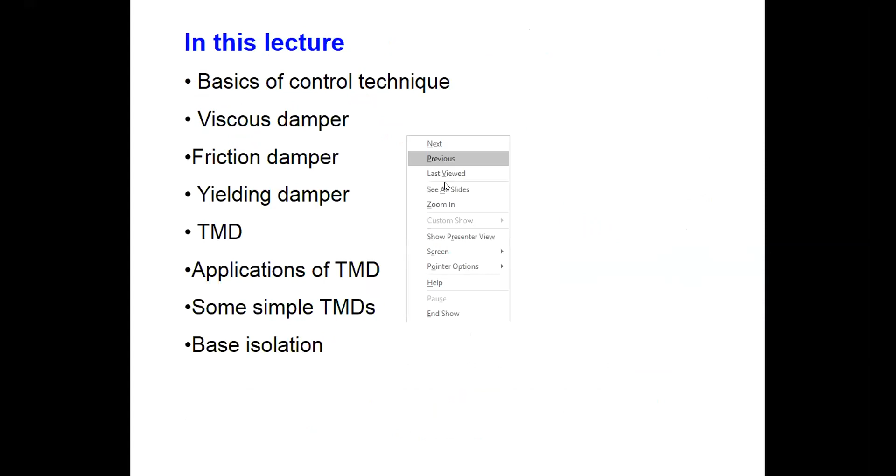So my presentation will cover some basic concepts, and then various types of dampers being used in civil engineering. We have the very commonly used viscous damper, friction damper, yielding damper, and this topic, TMD, tuned mass damper, which I will discuss in a little bit of detail. At VNIT we have done a lot of work on tuned mass dampers, particularly simple types of tuned mass dampers, and then I will also discuss a few things about base isolation.

I will play it again. So that is how shaking takes place. Sir, is my audio okay? Your audio is clear, and the audio for the video is also heard. Okay nice, okay so let us play once again, then how ground shakes, and because of that how the building vibrates. There is no damage, of course, except some peripheral things.

Okay, now let us have one more video. These videos are from E-Defense Lab, which is a very unique facility in the field of earthquake engineering. So how a structure, depending on its characteristics, responds to the earthquake. Okay, so we play it once again.

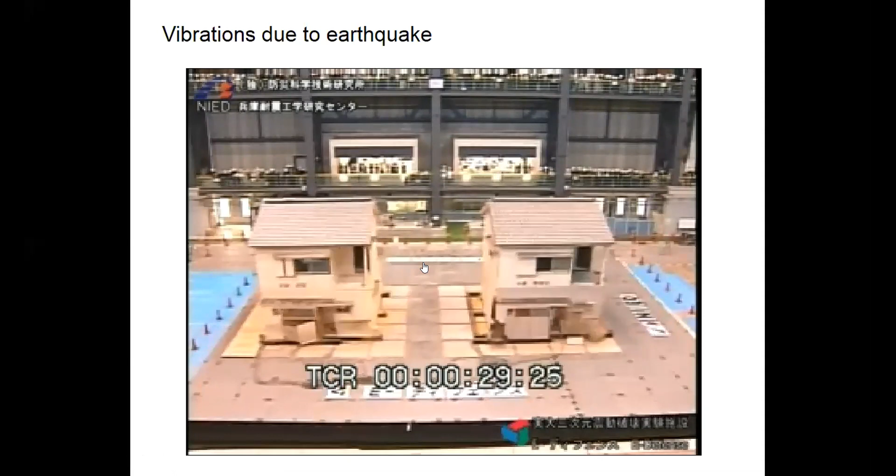So there are two buildings, both subjected to the same shaking. One has done well, another has not done well. Maybe they have put some additional features and wanted to test that. This is how ground shakes, and during ground shaking, structure vibrates. These buildings vibrate.

Now, response control is the topic for today's discussion. In that, damping is a very important parameter. All of us are quite used to dampers, shock absorbers, particularly in vehicles. So damping is of tremendous help in controlling the vibration response.

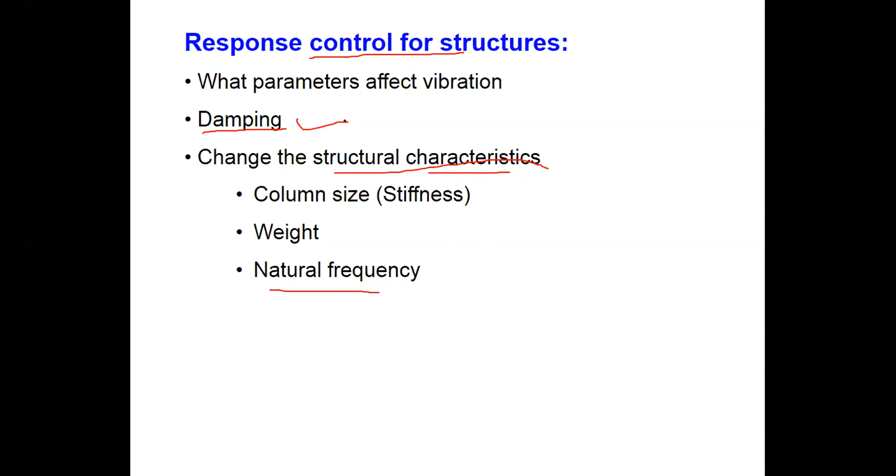The other option could be you change your structural characteristics itself, like you change the column size, weight, natural frequency, and things like that. But damping is something which provides a very good option to control the vibrations.

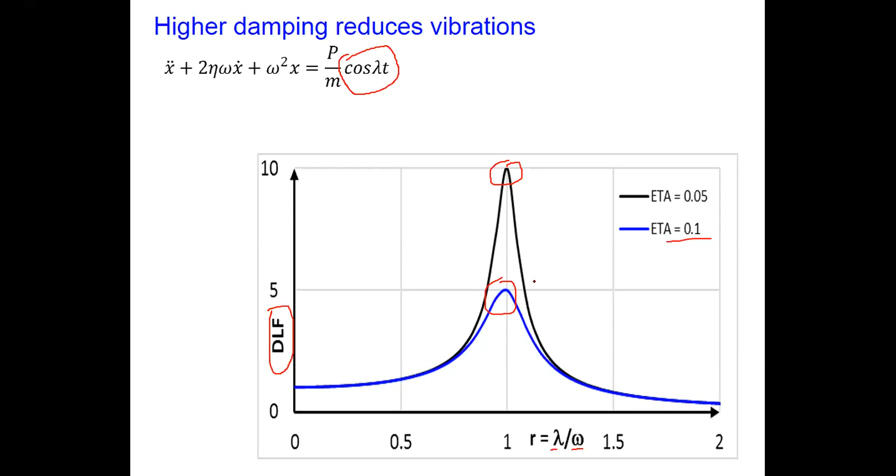As you go away from 1, the effect of damping is not much, it is negligible. On this side at 0.5, and here let us say 1.5, eta 0.05 and 0.1 graphs are same. So damping is very helpful in reducing the dynamic response, particularly in the resonance region.

Now, this is one way of playing with this thing. If suppose you know the exciting frequency - now, when will we know the exciting frequency? Suppose you are concerned with an industrial building, and a mechanical engineer says that I will mount a machine which will be vibrating at 25 hertz. So that machine will produce an exciting force at 25 hertz.

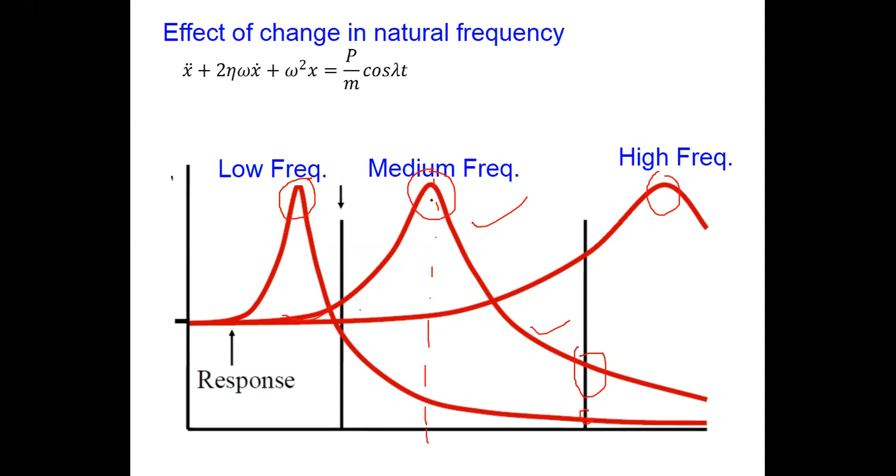So what I will do, I will shift the natural frequency of my building away from 25 hertz. I will avoid these regions. So if this is 25 hertz, then I will change my building characteristics such that I am on this side or that side of this graph. That is one way of playing with structural characteristics to avoid higher values of dynamic response. That is what is shown here.

Now in civil engineering we have passive control, we have active control, and then the remaining two are some hybrid form of that or a combination of the two. Semi-active and hybrid means some element of passiveness and some element of activeness.

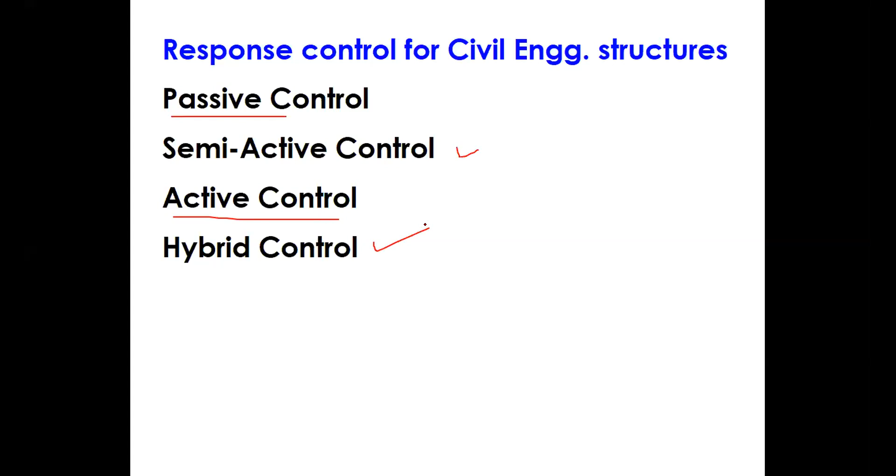See, active control means what? Something which is online. Passive control means the control mechanism will be present there whether the building is vibrating or not. Whereas active control mechanism will come into picture only when the building starts vibrating. So it requires a power supply, it requires sensors, it requires a feedback mechanism, and all those things should properly work.

Active control is very much a part of other fields like speech broadcasting - their filters are actively used to control the noise. Another example would be when you see cricket commentary: there is so much noise in the ground, but when the commentator speaks, that noise is suitably filtered. That is controlled through some active mechanism. Active filters are applied there, so that the noise doesn't enter.

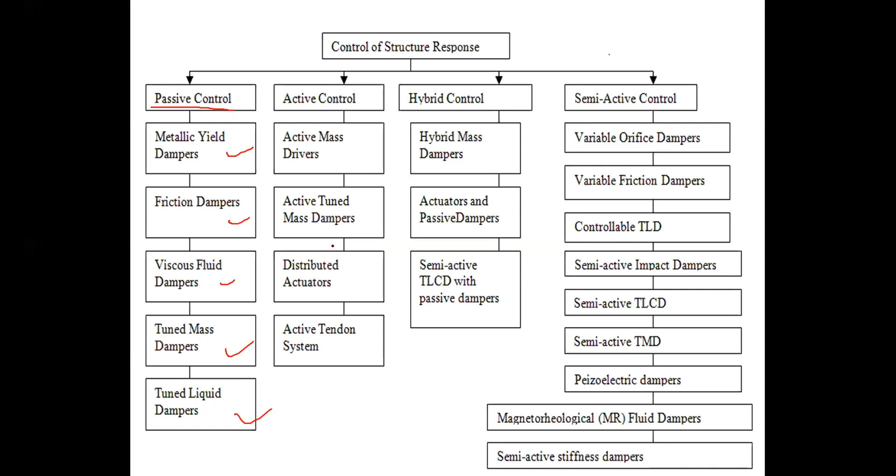Now where those active control mechanisms are used, their size is small. What do I mean by size? If suppose I have to apply active control in a scooter or in a car, the weight of the car and weight of the scooter is much smaller as compared to the size and weight of civil engineering structures. So in civil engineering structures, active mechanisms will require a lot of electric supply, a lot of other resources, because the size of the structure to be controlled is very large as compared to mechanical engineering applications.

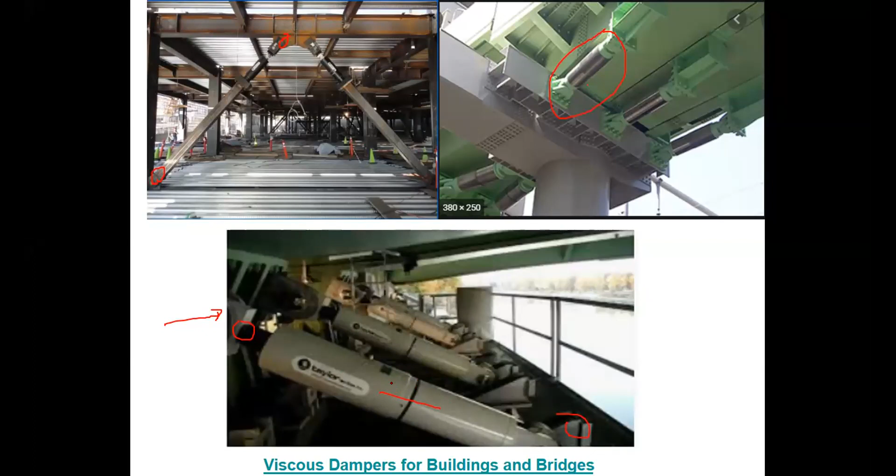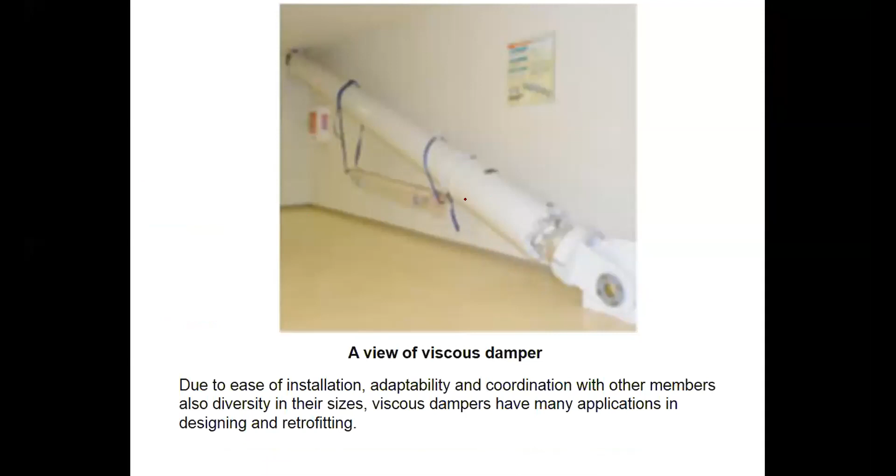So again, same thing, two ends - this is one end and this is another end. When there is a relative movement, this piston will move inside the chamber which is filled with fluid, and thereby energy will get dissipated through this movement inside the fluid. So that is how viscous dampers work. They are commercially available. Now they have to be properly deployed so that the function of the building doesn't get hampered, and at the same time aesthetics and look should not also get disturbed. So this is how viscous dampers work.

Now there is a video here. I'll play this video.

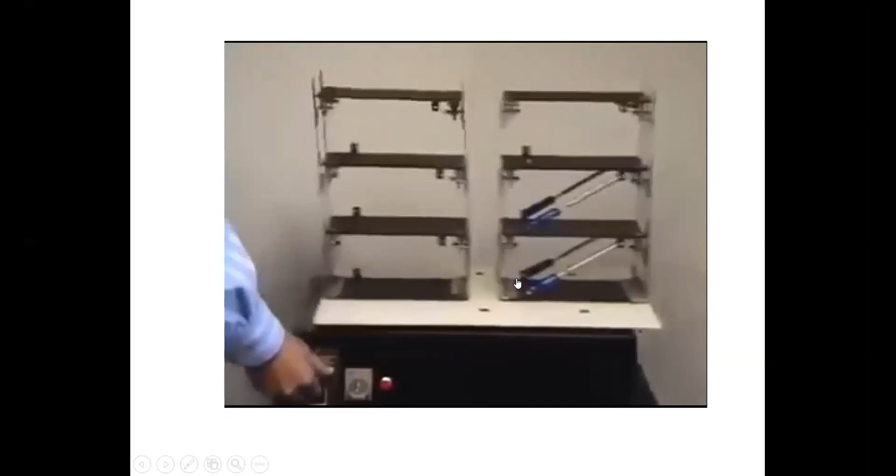See, these are two identical structures. One is fitted with viscous dampers, there are two viscous dampers here, and this one is not fitted with any viscous damper. When the ground is shaken, how do they respond? This structure which doesn't have any viscous damper vibrates.

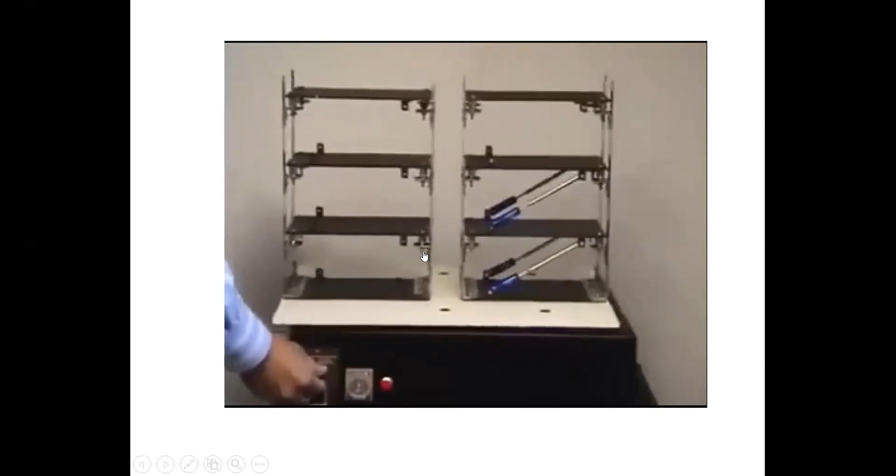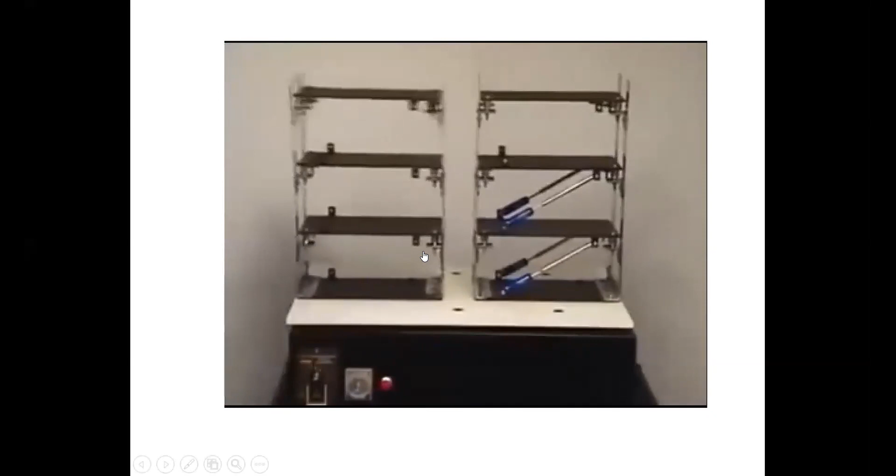I'll play again. Yeah, so that is a nice demonstration of how effective a viscous damper is.

Now, depending on the characteristics of the building, one has to suitably arrive at the size. How much fluid will be required? How much piston motion is expected to occur? That is how the length of the piston chamber will be decided. So that is a field in itself, wherein professionals are involved, apart from civil engineers, for this type of dampers.

Now, friction damper. The main purpose of dampers is to dissipate energy. In the viscous damper, it is dissipated through motion against the fluid. In friction damper, it is dissipated by introducing friction between two parts.

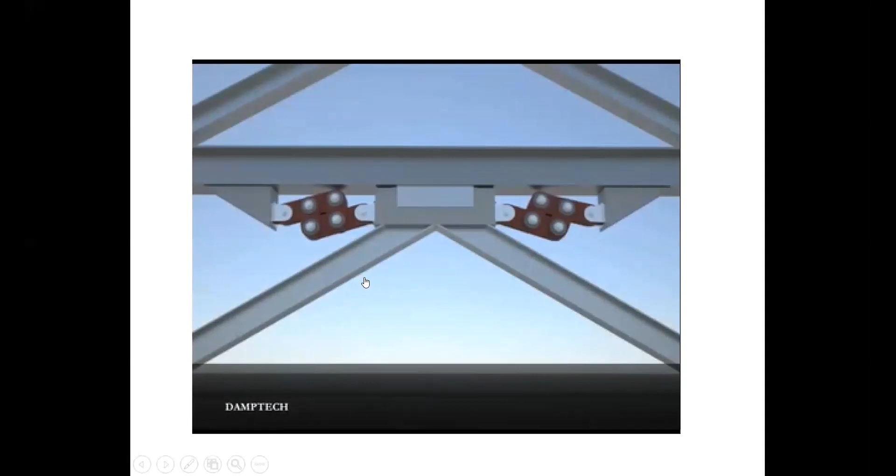Again, now there is a video. See, relative movement at two ends is transferred in the form of rubbing against these two parts. This part rubs against this part.

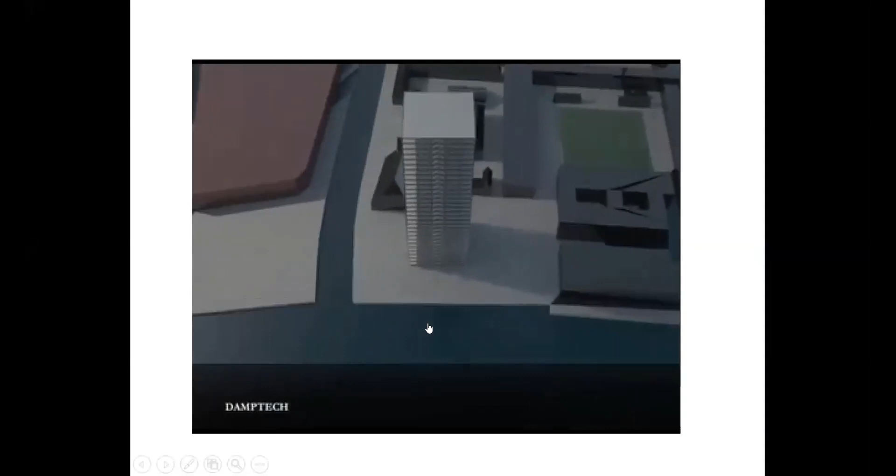And there are some frictions here also. So there is friction here, there is friction here. There are frictions here, here, and here, and they help in dissipating the energy.

So these are examples of friction dampers. Typically it is implemented in the form of a plate which is bolted to various parts, and these bolts are a hinge type of thing. They hold the two parts, but a little bit of movement is allowed. This is pictorially what is shown here.

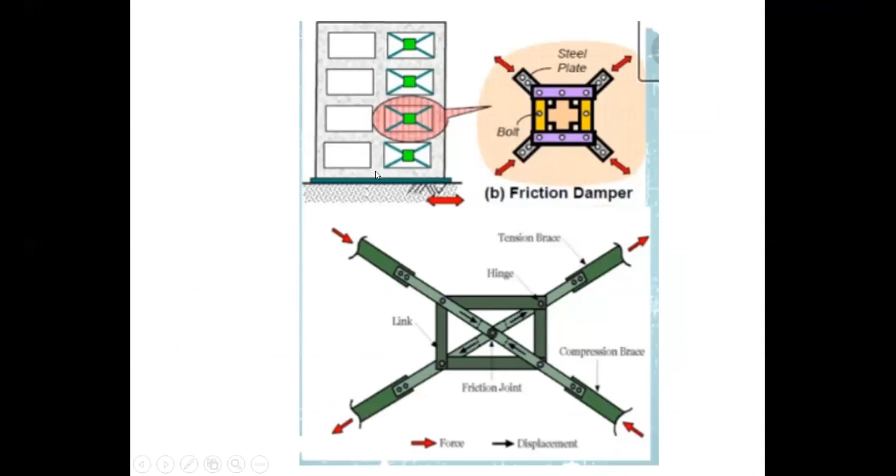And these are used in actual practice. There are places where friction dampers have been implemented and they have helped in reducing vibrations. So that is about friction dampers. Here also, mu will have to be properly decided, depending on what type of metals are being used, rubbing between two surfaces. And then, rather than area, how much vertical pressure, how much the bolt should be tightened, so that the required amount of energy dissipation is achieved.

Yielding dampers - what happens is this is the kind of arrangement we have. So when the building will vibrate, this series of plates you see here, they have a notch type of thing. Let me see if there is a figure.

Let us concentrate on this. One end is attached here, another attached here, and there is a very neck kind of thing here. So there is a neck kind of thing attached. This is the series of plates here. So when there is relative movement between the two ends,

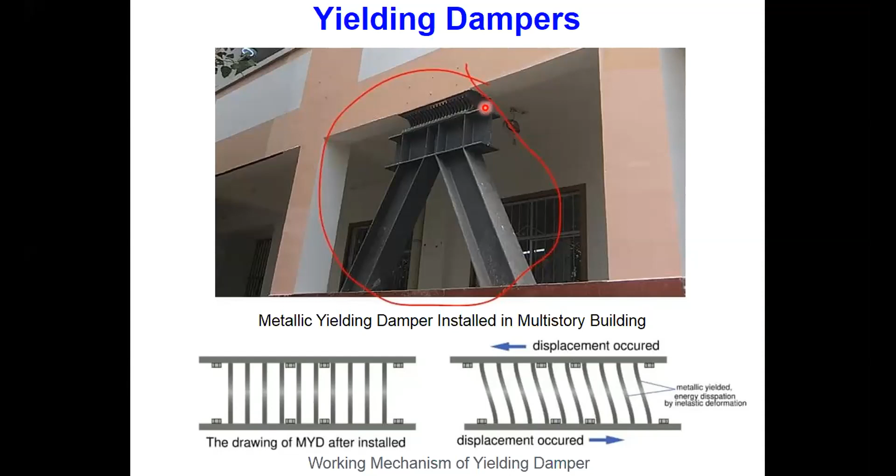this weak portion yields. It yields means - the best example of yielding is bubble gum, chewing gum. The yield goes to plastic deformation, and in the process, energy is dissipated. So there are a lot of examples of yield dampers in use.

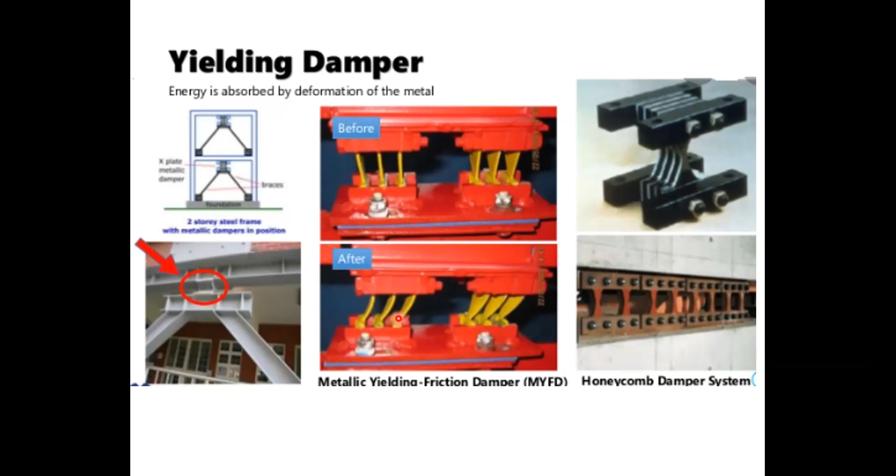This is before and after, as written here, after the testing. So they yield, they break, and then they are replaced. Because yielding itself suggests that they have to go into nonlinear range, and they will yield and things like that. So that is yielding damper.

Now again there is a video. This will be a little bit longer, but please have a look at it.

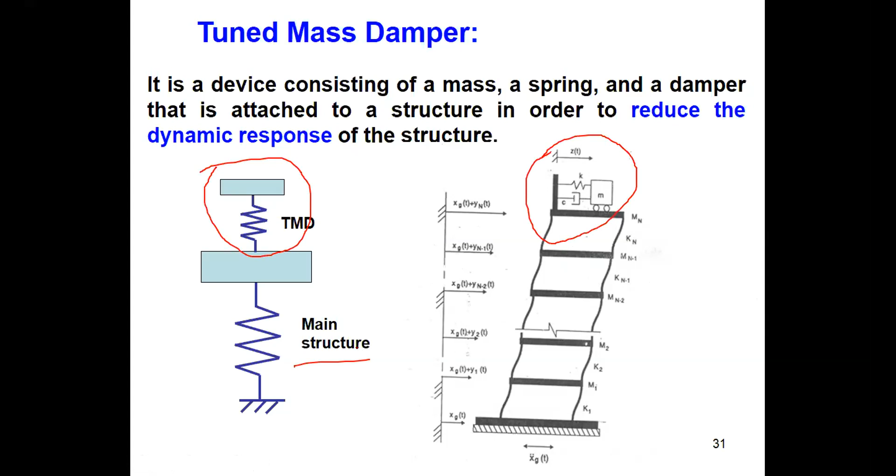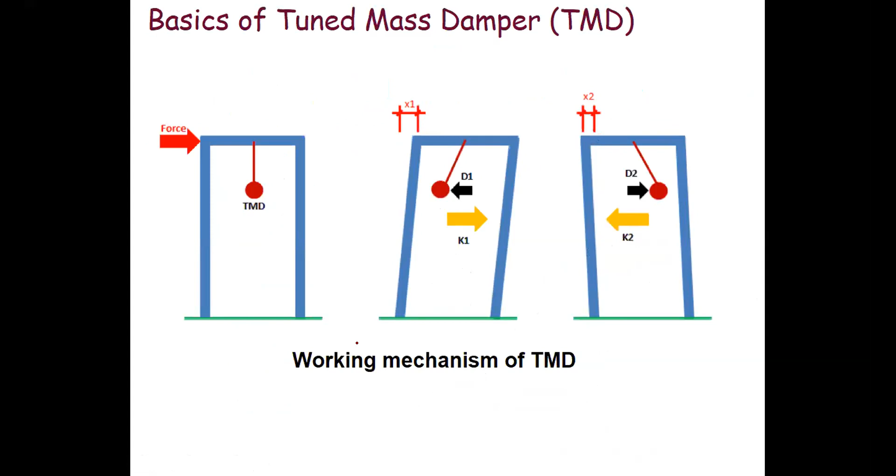This is the main structure. Now it is attached in such a way that it produces an effect which helps in balancing the structure. How does it happen? Suppose the building goes to the left, this pendulum will go to the right. So for that, you have to properly adjust its stiffness, its damping, and its mass, or in other terms, its natural frequency, so that this type of thing happens.

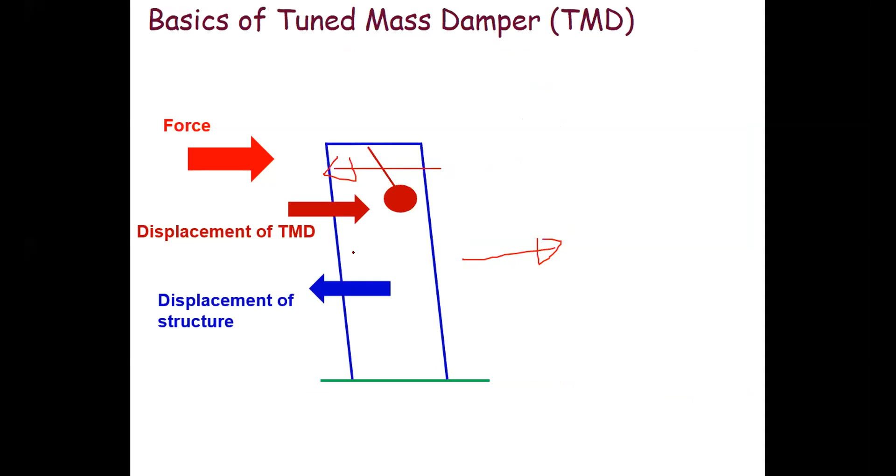And if the building goes in this direction, then it will go into the opposite of that. So this is the function of a tuned mass damper, or roughly, in a layman's language, this is how a tuned mass damper works. It produces a balancing effect, and for that purpose, its mass, stiffness, as well as damping has to be properly selected. Now let us see another video.

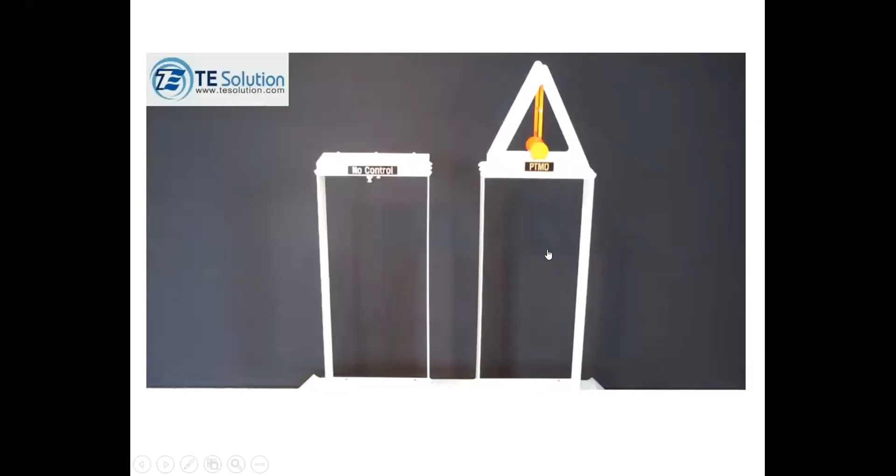Now they are unlocking the pendulum. See, once this pendulum, or TMD, comes into picture, this structure vibrates more, while this structure's vibration is very less. Let me play it once again.

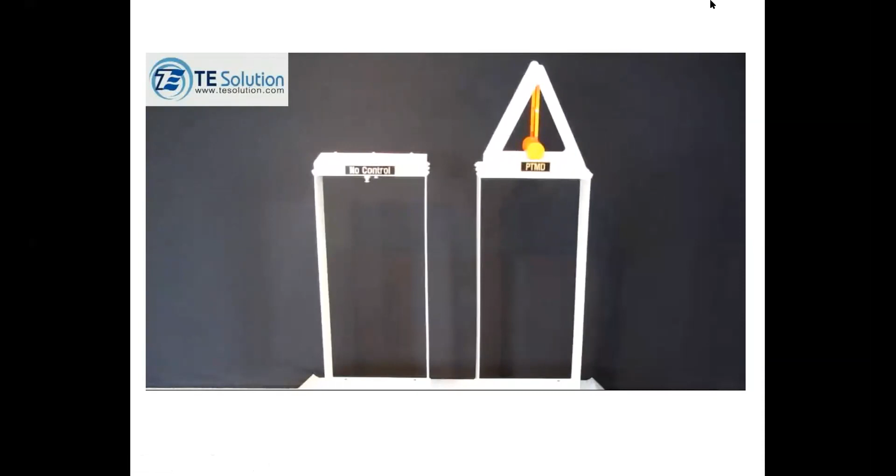Okay, so that is how this pendulum effectively reduces the vibration.

The mass ratio is how much additional mass you can put on the structure. Beta is the damping of the main system, and xi is the damping of the TMD. And F is the frequency ratio: the natural frequency of the TMD divided by the natural frequency of the main structure.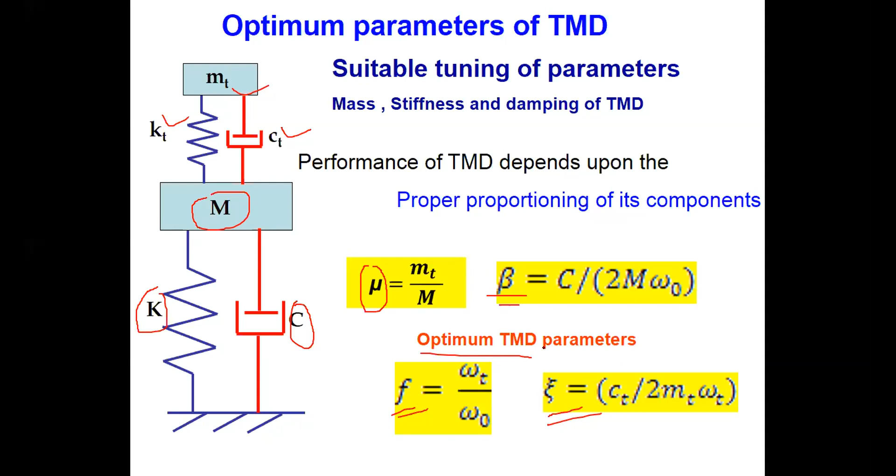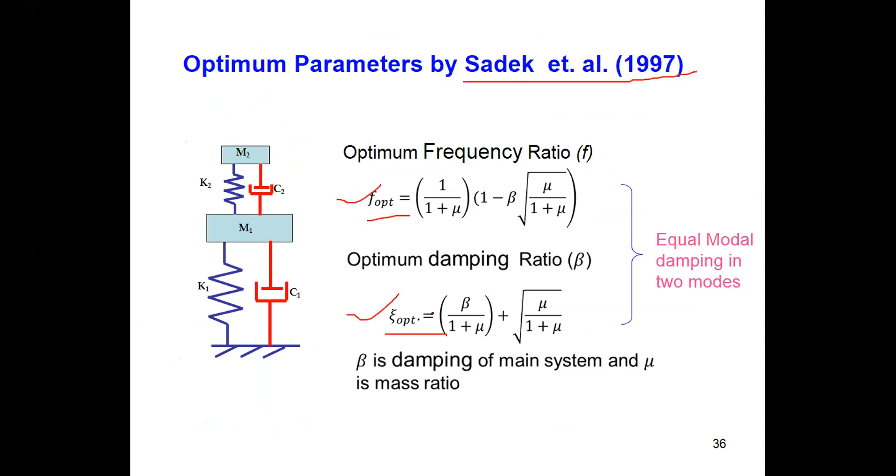With these four parameters, one can design the TMD depending on what efficiency you want. This exercise of finding the most efficient tuned mass damper is known as optimum tuned mass damper, or optimization. You decide mass ratio, frequency ratio, and xi in such a way that you get maximum reduction in the response. There are studies, for those interested in further research, right from Den Hartog in the 40s till date, people are proposing various optimum parameters for tuned mass dampers—optimum frequency ratio, optimum damping—so that one gets maximum benefit or reduction in response.

Now, across the globe, there are many interesting structures fitted with tuned mass dampers. The most celebrated example is Taipei Tower in Taiwan. It is a 101-story building, that is how it is named 101—Taipei 101. In this 101-story building...

Now, the length of the rope and mass of this pendulum ball is adjusted depending on the natural frequency of this tower, Taipei 101, and then it is very effective. There are video recordings showing that during high wind it has helped control the vibrations, and during earthquakes also it has helped control the vibration. So this is one example where the TMD is of pendulum type.

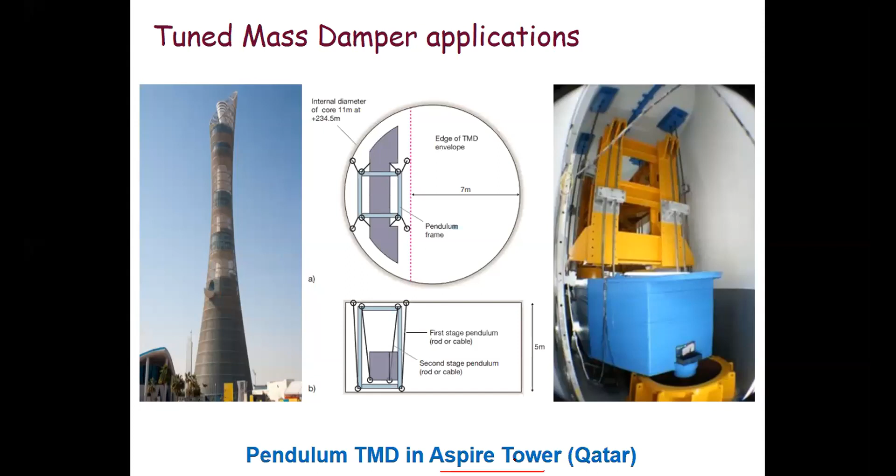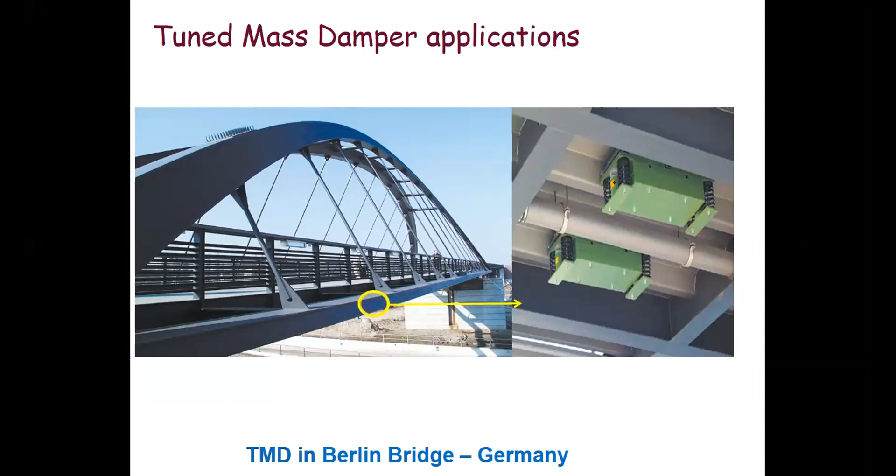This is another type of tuned mass damper with a heavy block and a spring—so this is not pendulum type, the heavy mass is kept on the spring. During vibration, this acts as a secondary system and helps in controlling it. So there are basically two types of tuned mass damper: mass resting on a spring, and pendulum type.

There are thousands of buildings all over the world fitted with tuned mass dampers. Some of the studies we did at VNIT were tuned mass dampers for multi-story buildings, elevated water tanks, and tall chimneys. In all these studies, our aim was that the tuned mass damper should be simple.

It has to be simple—I'm trying to write with the help of the mouse, that's why all these funny things are happening. Simple. What do you mean by simple?

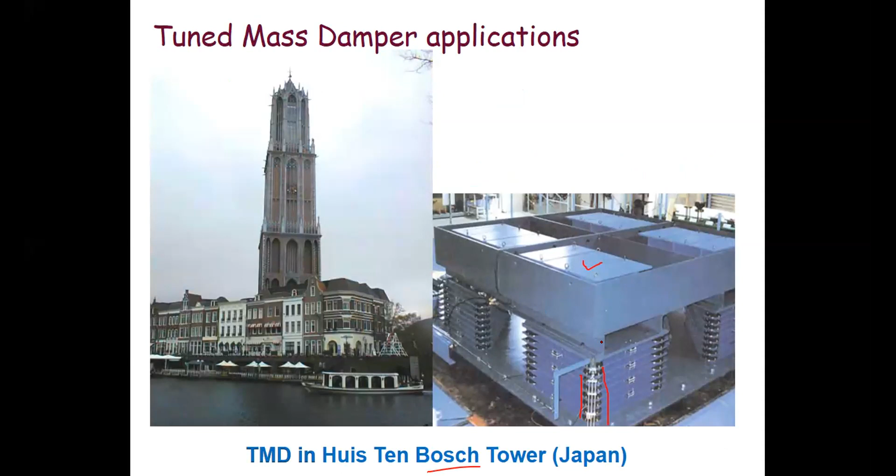This TMD, like the one in the Huis Ten Bosch Tower in Japan, requires regular maintenance. It requires additional construction, additional cost, and additional technology, so that on an RCC building you can mount such a mechanical device. It will require additional technology, additional maintenance, additional cost, and more money.

Whereas we want something simple. So how do we do these simple things? Such a simple TMD may not be as effective as those other devices. If you have a building like this,

construct one more story, with beam and column sizes different from the rest. This building won't be for occupancy. The columns of this additional story could be of steel or steel tube filled with concrete, making it a weak story. It will be adjusted so that when the building swings to the left, this story swings to the right. This kind of adjustment can be done by matching the natural frequency of this additional part to the natural frequency of the existing structure.

If that is done, it is helpful, and it is simple in the sense that whatever technology you use to construct the building, the same technology can be used here. There will be hardly any maintenance, and not much additional cost either.

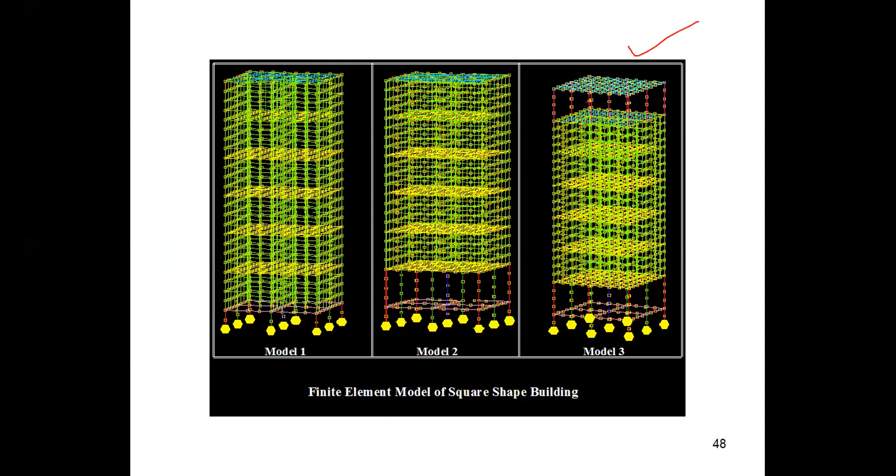We did all sorts of modeling of this tuned mass damper. This third model, M3, has a TMD at the top, and we checked its effectiveness. Model M1 is the first building, M3 is this one with TMD, and M2 is the worst case with no control.

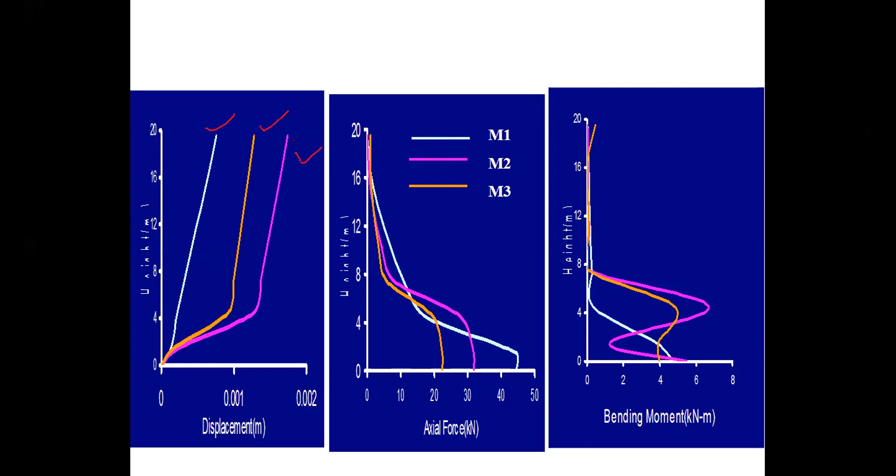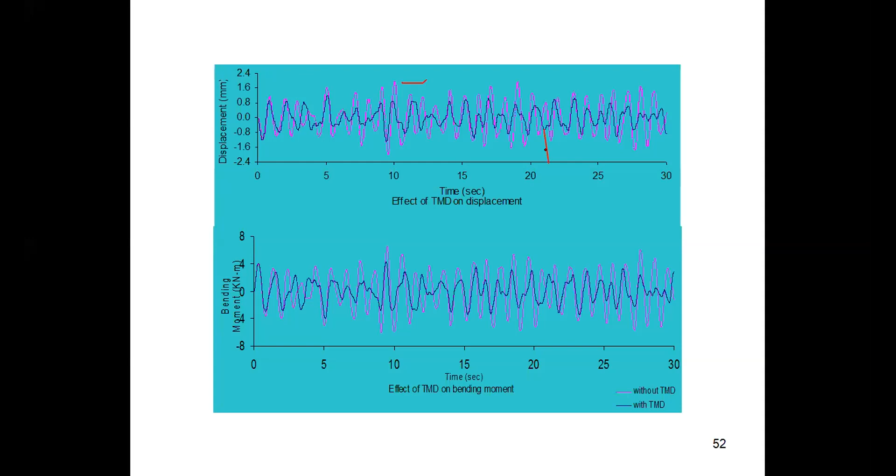That was for the building. Now, doing dynamic analysis by solving the equations of motion, the response without control is given by the red line, and with control you get this blue line, which shows that vibrations have reduced because of this simple weak story at the top.

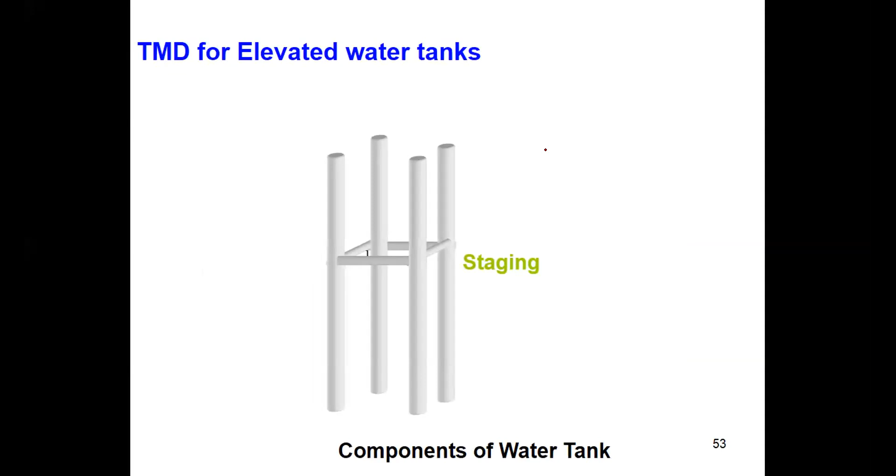Now for the water tank, let me explain what an elevated water tank looks like. It typically has the staging, then the base slab, then the container wall, and at the top a slab. Since the slab diameter is large, there are internal columns, and these columns are inside the liquid, inside the water.

In elevation, we have something like this: roof slab, container, column, inside columns. So we detach here — this portion is detached, the roof slab is detached from the wall. Then the column and the roof slab act as a tuned mass damper, with no additional cost, nothing.

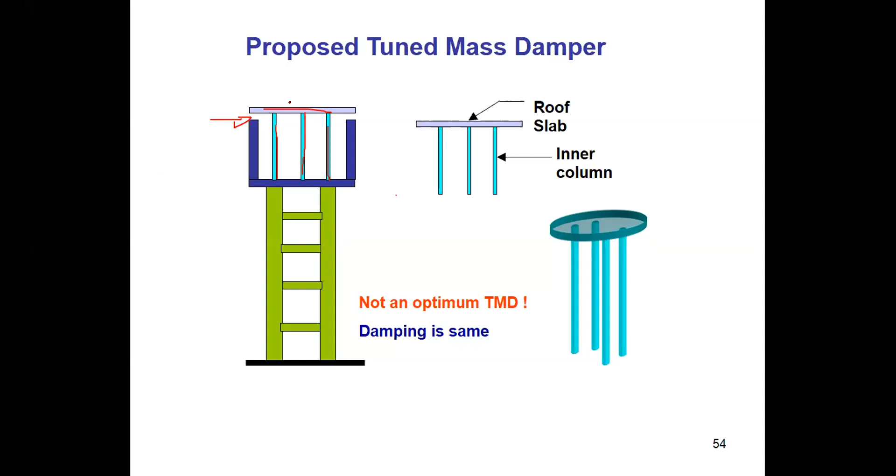I am just detaching the slab from the wall vertically, so that it can vibrate independently, and that helps. This is without TMD, this is with TMD after detachment. Doing the analysis, you can show that the peak without TMD has gotten reduced by about 15% with TMD.

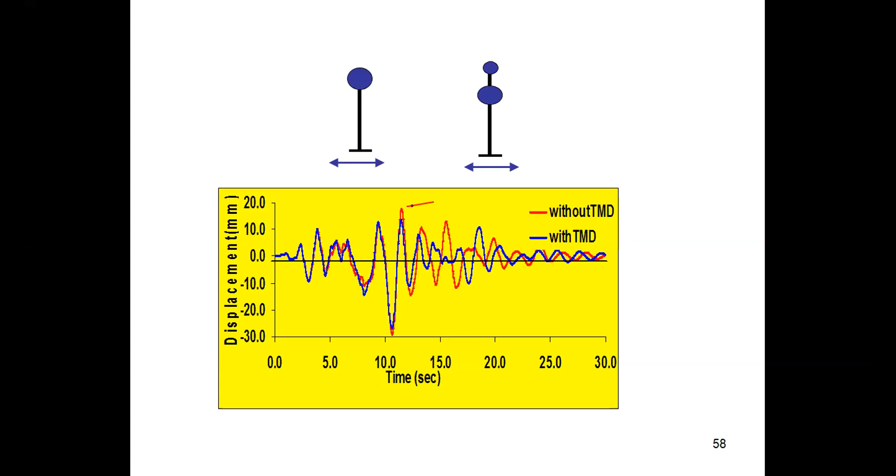So these are very simple things I am showing you. There is no additional damping, no additional issues to be added. Their performance is a little less efficient compared to a classical TMD, but they are very simple — that is the beauty of them.

Then the chimney. If you look closely at a chimney, there are flues, and outside is the RCC shell, with platforms at regular intervals supporting the flue, from which smoke comes out. So, what we have done in the chimney for the tuned mass damper—

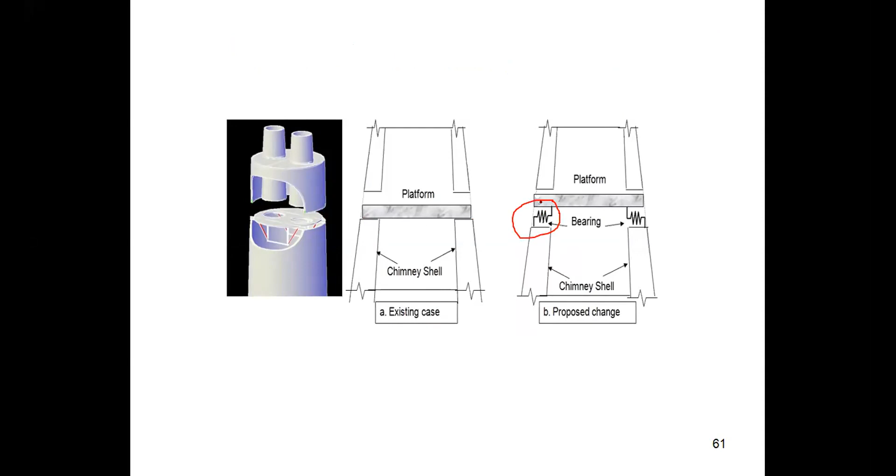this platform, which is circular with holes for the flue, normally rests directly on the chimney shell, the RCC shell. Rather than resting directly, you put a bearing here, like the bearing we have in bridges between deck and pier, so that this platform now acts like a tuned mass damper.

This is the structural detail of how the platform is supported. There are two main girders, then secondary girders, and other girders, and these triangles show the points where they rest on the RCC shell. We replace these triangles with a stiffness mechanism, such as an elastomeric bearing, so that the bearings and the platform together act as a tuned mass damper, having mass and stiffness.

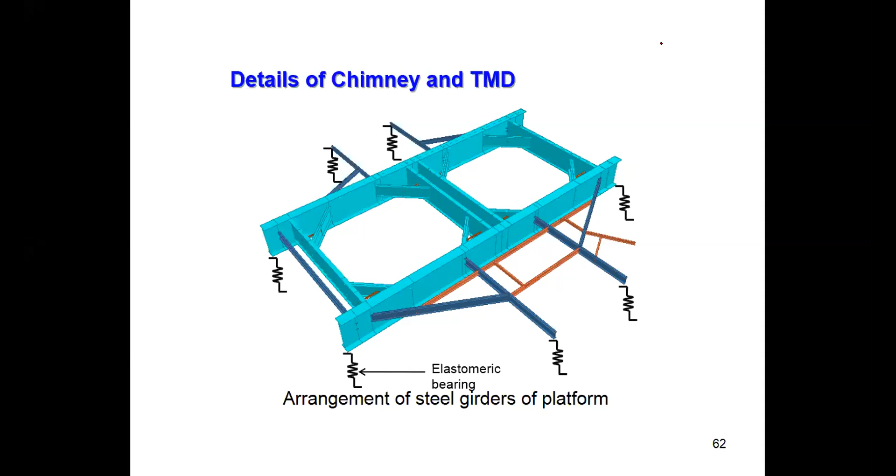Now the rest of it is result, once you see. Now here also, what is the beauty? The beauty is that TMD has been derived from the existing component. There is no additional cost, just a little bit of modification.

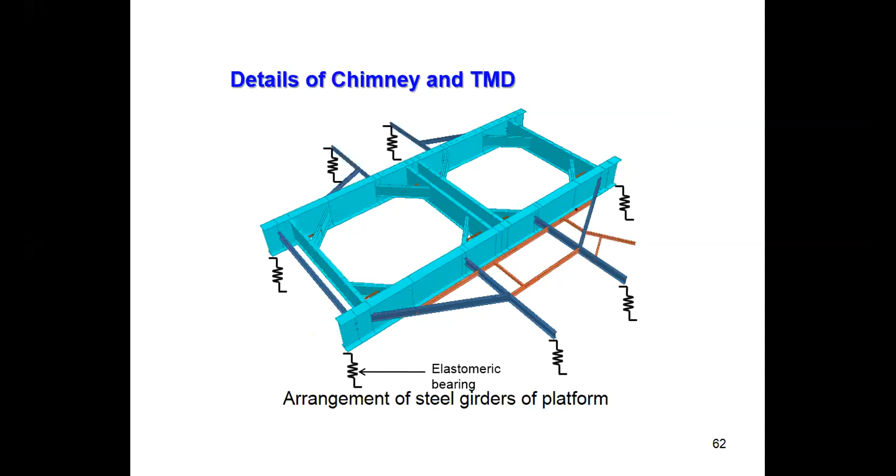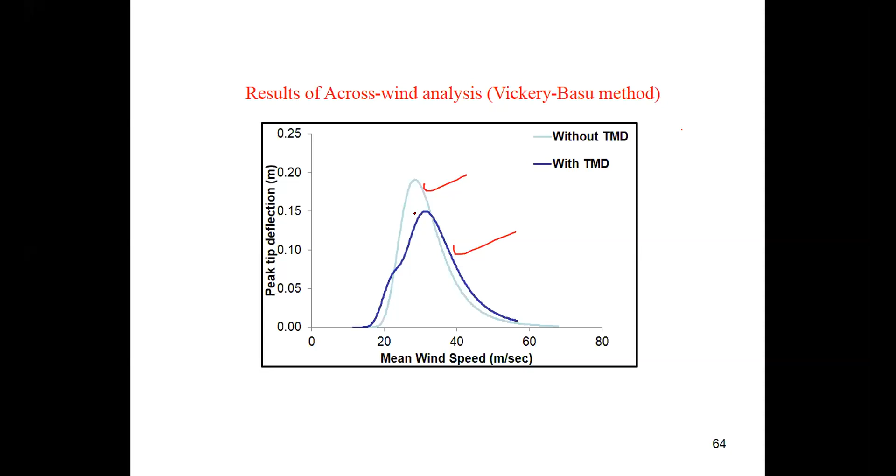Now across wind response is like vortex shedding, it's like resonance. So without TMD is this faint color graph, with TMD is this dark blue color graph. So at critical velocity or at resonant velocity, there is a huge reduction, 30 to 40%, because of tuned mass damper.

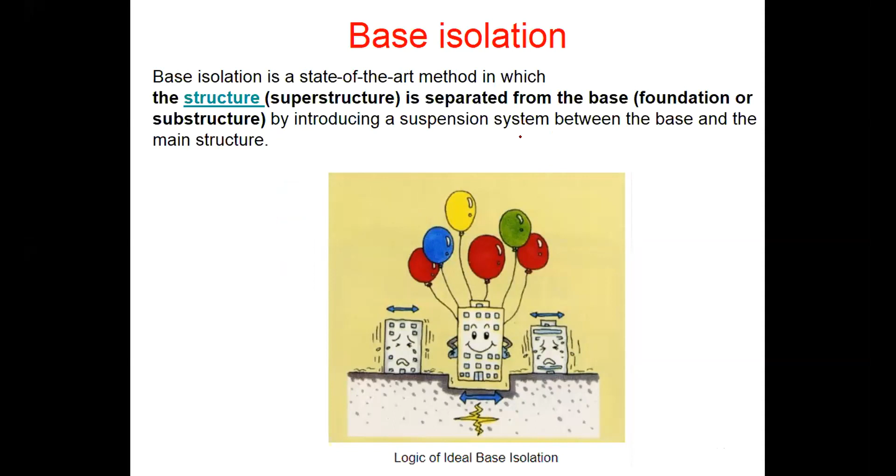Now, the last thing is base isolation. This is a very efficient and very effective technique, and of late it is being increasingly used. Rather than these dampers, now people are going more and more for base isolation. What is done in base isolation? To demonstrate that, there is a video here. Let me go to the option. I'll play this video and then explain base isolation, and then we'll stop.

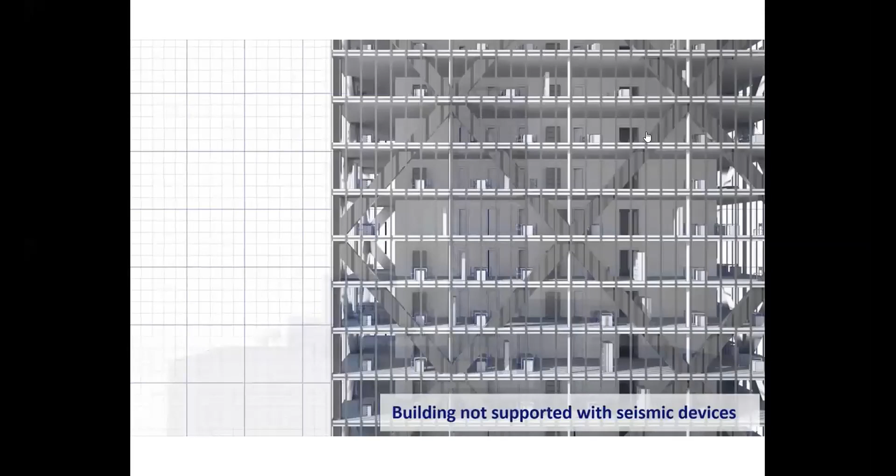Now see, they will put isolation now. Whatever simulation or animation you have seen was without isolation. Now they have deployed isolation devices at the base.

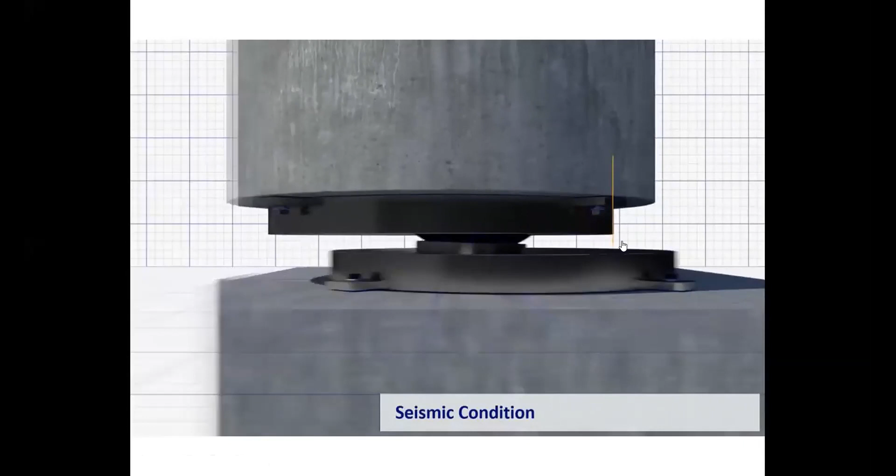Now details of this isolation, what does it comprise of? There is a ball kind of thing here, which can slide on this base.

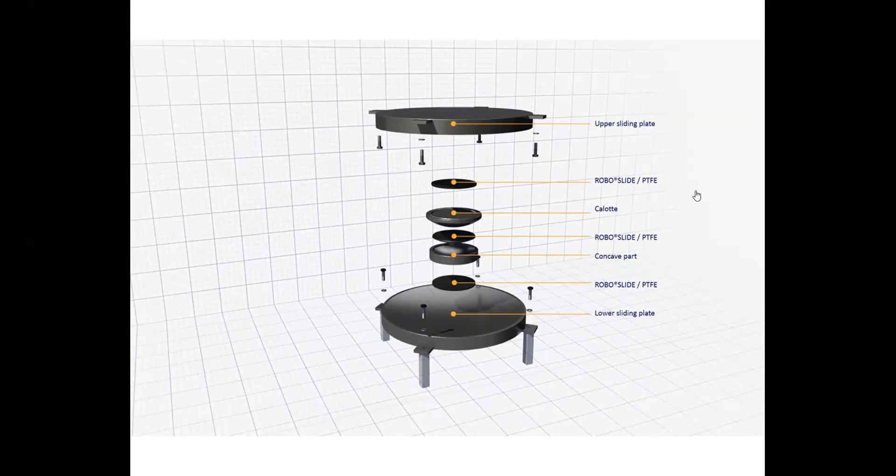These are the various components of a typical base isolation. There is a lower plate, and then there is an upper sliding plate, and then all these arrangements. So it's like the building is put on a roller, so that when the ground shakes, the building rolls. But since it should not go unlimited, this roller is in the form of an elliptical shape and other things.

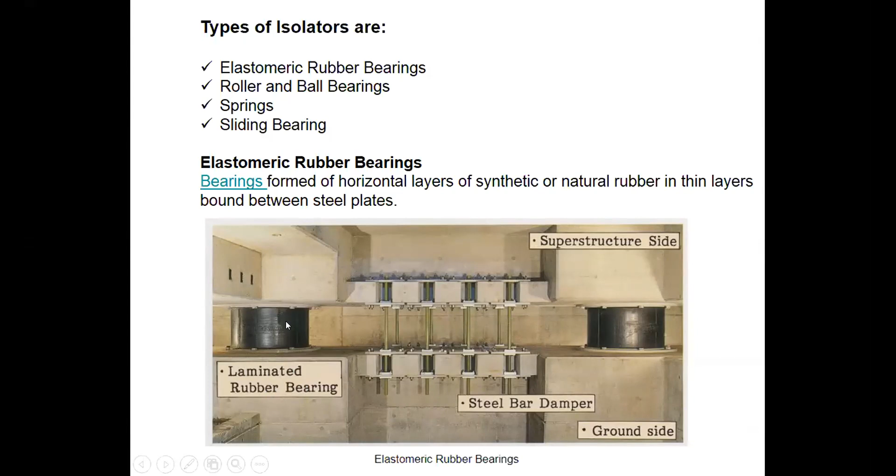So that is the description of base isolation. Now this is one place where base isolation comprises of laminated rubber bearings, that is one type of bearing, like this kind of arrangement. This whole building column continues from here and there is this arrangement. Should there be a ground shaking, only this portion will shake. The whole building won't shake as we have seen in the animation. It comprises of, as I said, a sort of roller kind of thing which is kept and which rolls during this.

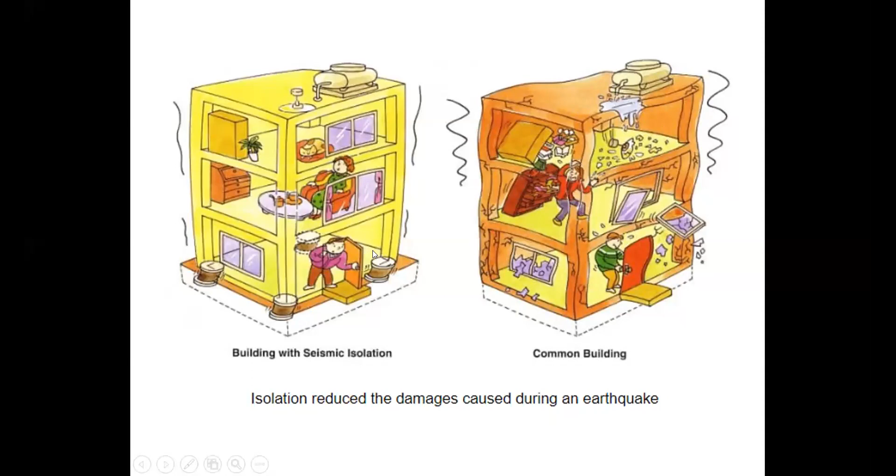This is the one being used in India, the military hospital in Bhuj, the district hospital in Bhuj, wherein base isolations have been used, and now applications are increasing.

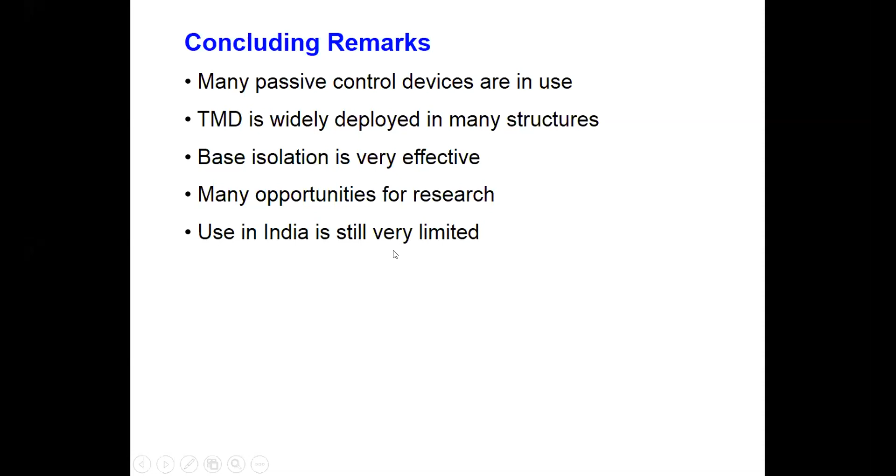So we will end here, and in conclusion, I'll say that those young students who want to take part in these research activities should get into this field of control of vibrations during earthquake or during wind. This is a very challenging field and a lot of new things are coming up in this field. I have just given you glimpses of various types of passive devices and a few more things about TMD, some very brief description about base isolation. There are many opportunities in research in this field, and so far its use in India is limited. So with that I will stop here.

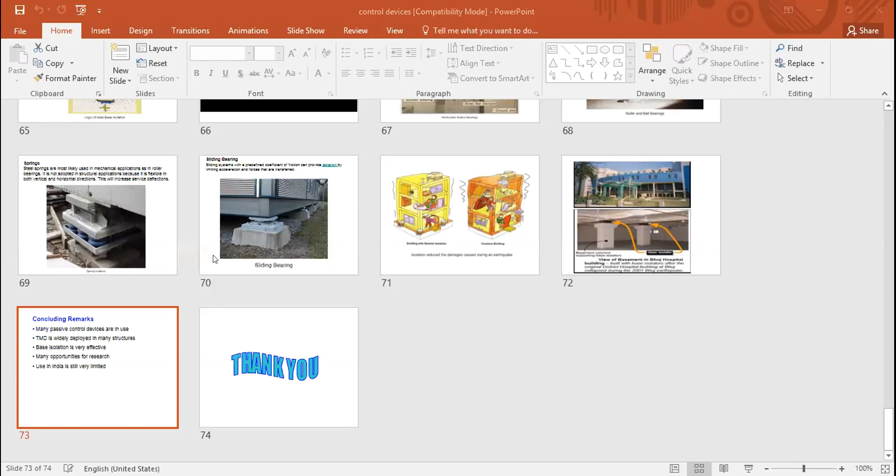Now you are able to see this slide, TMD application in India? Yes, sir. Yes, sir.

One is in the air traffic control tower at Delhi airport, this New Delhi airport. In this portion from where traffic is controlled, they have put a TMD. That is what is given in a paper. I haven't physically seen that. In one of the technical papers, this information is given.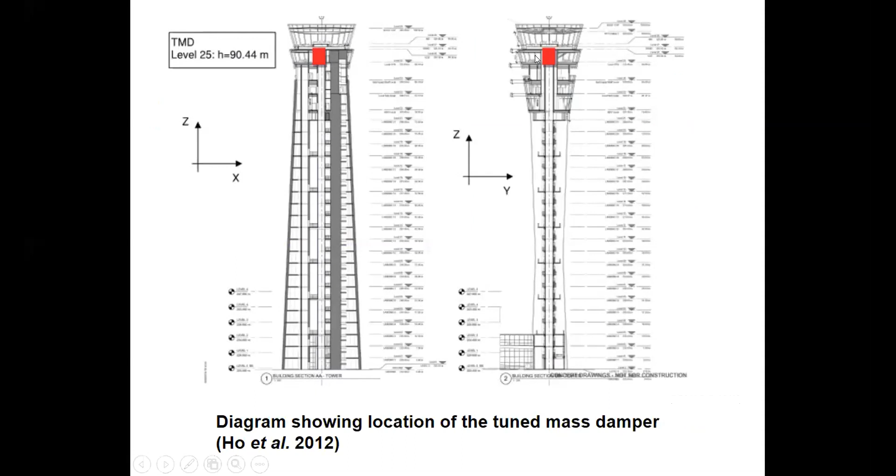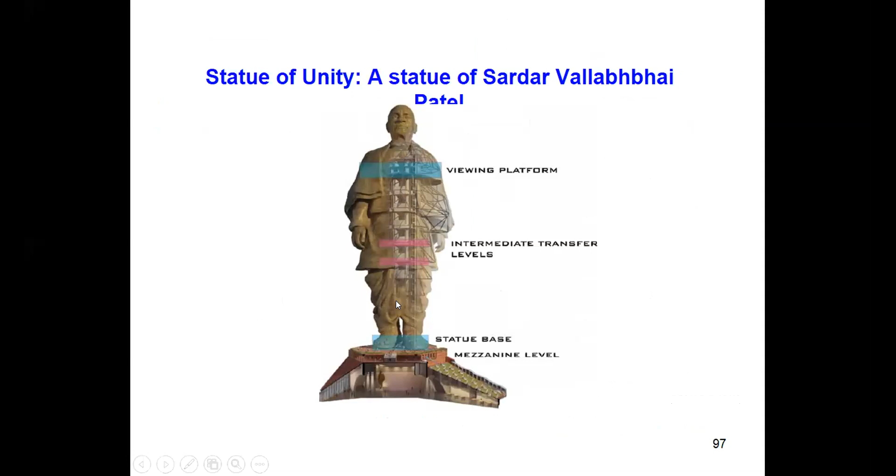Next is Statue of Unity, Sardar Vallabhbhai Patel statue. Now if you see this, though there is a statue, the basic structural form is like this. There are two elements, so to say it is like a shear wall, and there is an RCC portion, and then all around that there is a steel fabrication, which gives it the shape of the statue. I have only these two slides.

Then the next question here is: for pendulum type TMD damper, how are the calculated damping and frequency parameters of TMD applied to real time models, sir? Since mass hangs on rope, how are these parameters applied? See, basically for TMD you require a mass, you require a stiffness. So in some sense a natural frequency is required, and of course some damping is also required. So if it is a damper, as I have shown you in the case of Taipei 101...